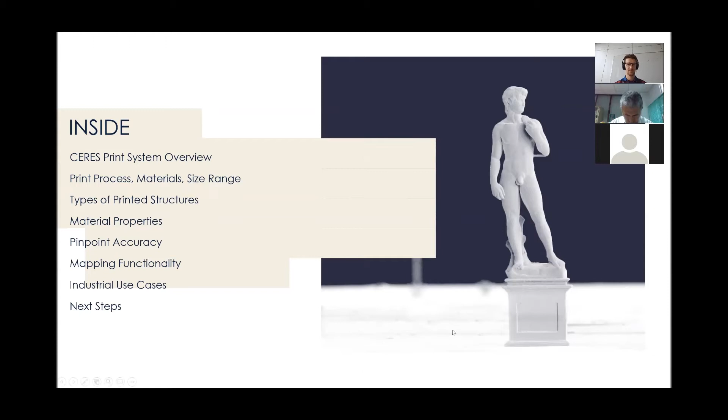Exaddon was formerly part of Cytosurge, a biotech company here in Switzerland who developed a well-renowned technology called FluidFM. It was previously a business unit of that company, and we developed into this standalone business focusing purely on the additive micromanufacturing of metals.

This has become its own company because there is so much demand for it, and we see it being such a promising technology. We have ongoing research collaborations with various premier academic institutions such as ETH in Zurich, EMPA, the Swiss Federal Material Science and Technology Institute, and also FBH in Berlin, Germany.

Our core technology we call Ceres, which is a unique printing technology. It is a standalone system, as you see on the left here. No need for a clean room. You can just have it in your lab, and it prints at room temperature using a very localized electrochemical deposition. The Ceres machine is capable of printing fine lines in 2D and also 3D structures out of metals, using this electrochemical deposition method through what is in essence a hollow AFM cantilever tip.

We print what we call voxels in a layer by layer sequence within an electrolyte bath, and horizontal prints are possible with this system. This is a really unique system, and we see it having unique application. It's a system for innovators and visionaries who see what additive micromanufacturing can do for their use case.

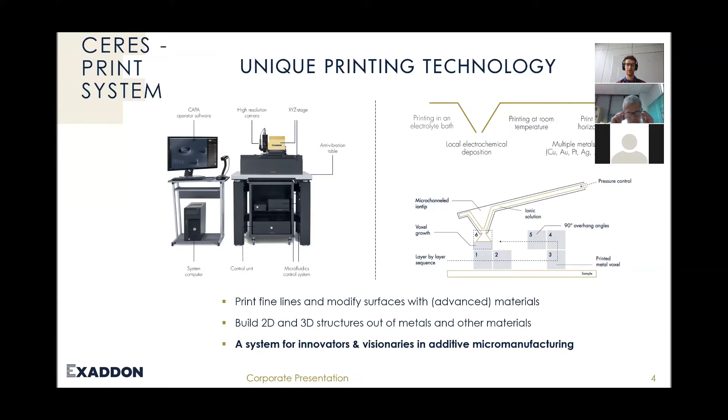So we conducted a competitive landscape analysis within the world of micro-scale additive manufacturing. While there are people printing polymers at a similar size range to us, there is nobody we have seen who is able to print complex metal objects in the same size range as us. This really is a unique technology with unique applications.

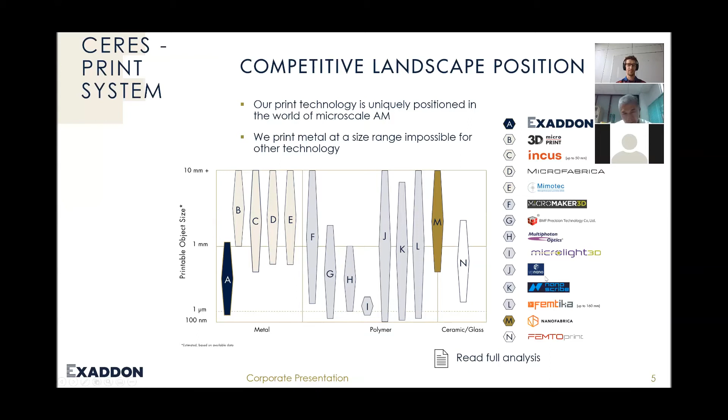Research is very important to us, and we are well integrated into the science community. We have frequent publications in high impact journals, and we focus on ongoing cooperation and collaboration. Even before we spun off into a separate business, we had publications in key journals, and we're continuing that now.

So we print using electrochemical deposition, and in theory, anything that can be electroplated can be printed. We see particularly copper and gold as being the key metals, and that's what we focused a lot of time on, copper specifically in the microelectronics industry. We print on substrates, as it is electrodeposition, primarily focused on copper, gold, and flexible polymers such as PEDOT.

One of the key aspects of our technology is that we operate at the microscale. As you see in the smaller image, we are able to print nanopillars which have a diameter of only around 200 nanometers, all the way up to our version of Michelangelo's David at around 1,000 micrometers.

The beauty of our system is that the size of the minimum features of a given printed object can be changed whilst printing, without the need for a different printing tip. This is all through tuning the diameter of the voxels that we print. This being tunable on the fly means the user can customize what they're printing without any changing of tips.

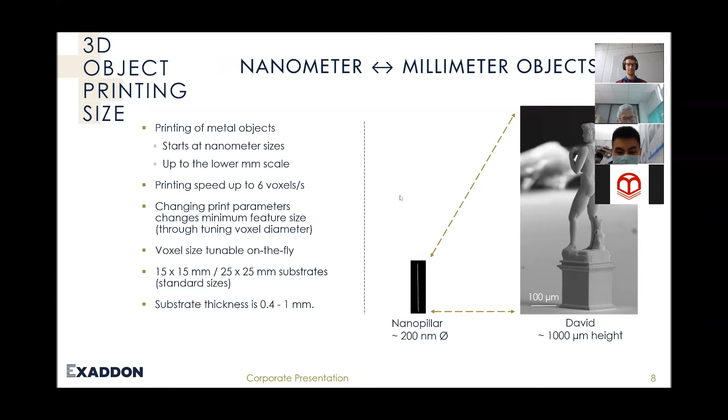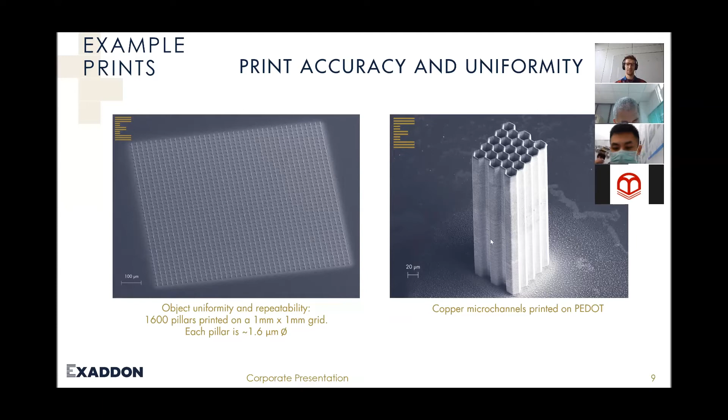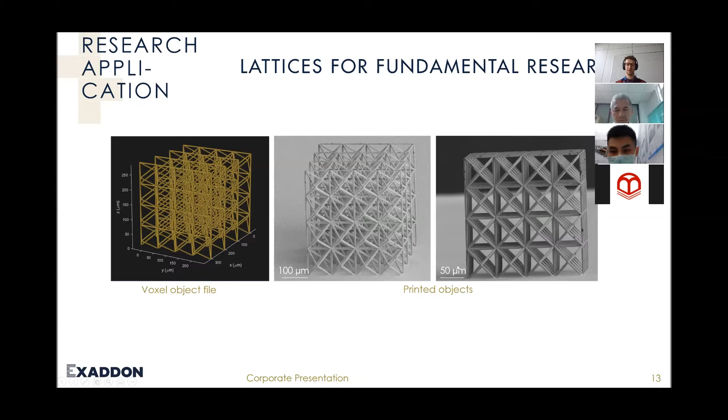Our Ceres machine enables a wide variety of possible geometries of these metal objects, from coils to lattices, hollow volume objects, and the layer-by-layer deposition enables these overhangs to be printed without the need for support struts or any post-processing.

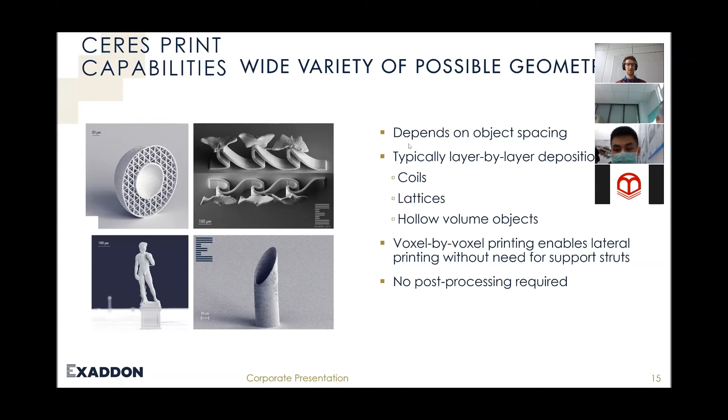Crucially, the mechanical properties of our metal objects are very sound. In mechanical hysteresis testing, we can see that the printed copper is very elastic, it's mechanically stable, and there's excellent adhesion to the gold substrate.

In terms of the material density, we've achieved over 99% density of a solid copper print, as can be seen here through the FIB slicing. We can see the homogeneous grain structure. There's no trace of individual voxels anymore.

And the conductivity of printed objects is very good. Taking away the copper to gold contacts, we're achieving conductivity close to that of bulk copper.

Now, this being an optical system, this functionality is optical, the limit of accuracy is around 4 to 5 micrometers. And for really accurate work, we want to develop something which would better this.

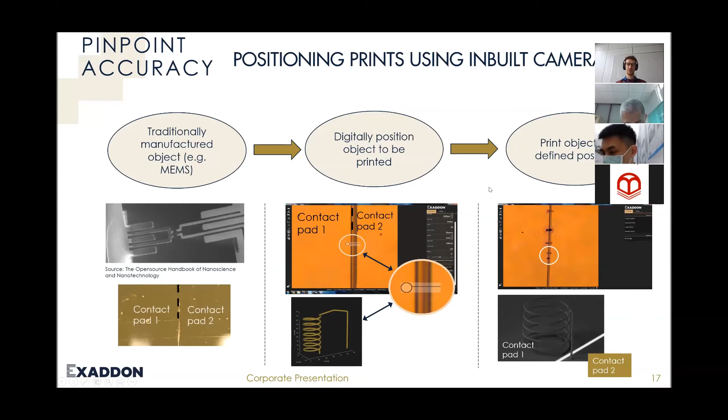So we worked on developing what we call a mapping functionality. This mapping process is to map the surface topography of existing structures, and to do so with sub-micron precision, beyond optical resolution, which we already have.

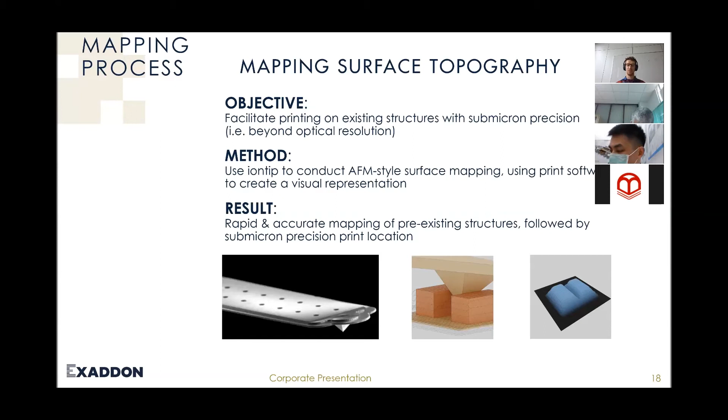We want to use this so that we can map a pre-existing structure and then print on it whatever print object we want or the user wants, and do so with sub-micron precision.

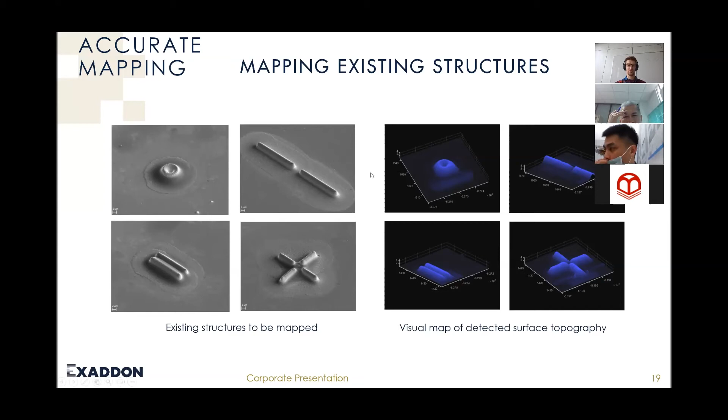From map to object location, we have the existing structure here on the left. The tip interacts with these, and each time the tip touches it, it deflects slightly as per an AFM, and it produces, it gives data to our system.

Using our software, we produce a visual representation of this. The user is given absolute and relative coordinates of a given structure. Given that they then have that, they can print all in one seamless workflow at a location on that structure with sub-micron precision.

To go through this example here, we have this sort of cross structure on the left. The tip has interacted with it during this mapping workflow. We get this representation of the surface, which has been mapped, as you see in the second image.